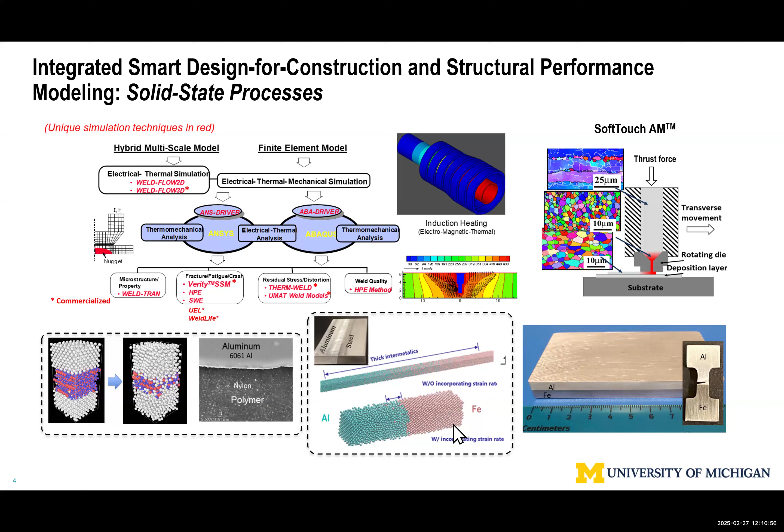So this is what this chart tries to show. Actually, we can replicate that in our experimental setting and demonstrate that the sample is very strong, also corrosion resistant. Later I'll get into that a little bit. So those are the nitty-gritty details. We do a lot of things.

Actually, I try to motivate students who interact with me, saying we don't want to forget the bigger picture. So the bigger picture from those nitty-gritty details leads to say we want quality of life, which is important for naval architecture and marine engineering. Obviously, spring break is coming up, so that's something you might want to consider.

National security is a major topic discussed by this department. We talk about Virginia class and Columbia class submarines, and the difficulty in meeting national security demands.

Energy security continues to be important, obviously with LNG. I'm showing the same picture I use in my 461 class - the Prelude, which is still, I think, the largest floating structure built on the commercial side.

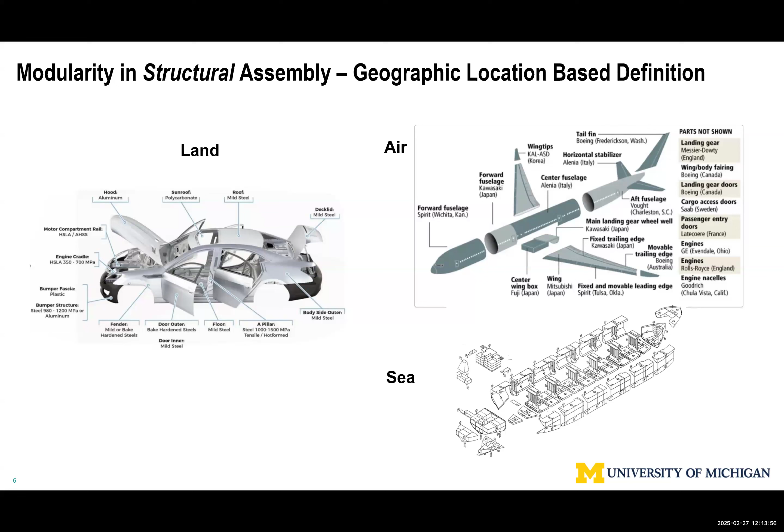With ship structures, from the US shipbuilding point of view, we're still in the early 1990s, late 1980s. This chart was presented to Avondale around the beginning of the 1990s, showing how to achieve modular construction for ship structure, since we're dealing with a very unique product. This is essentially the bible every shipyard tries to introduce into their production process.

What's missing is that all this looks good and makes sense, but it doesn't have the mechanics or physics underpinning how to go about things - what to do before each unit. At the unit level, we can follow IHI, Ishikawajima, which transferred technology to the US back in the 90s. I call that group technology, and while you can read the entire book, I simply summarize it as essentially two items: similarity in interim product forms. Interim product here means everything in between that leads to a given identifiable module - every step of the way has to have a certain principle imposed.

The Japanese had tremendous success with this in the 1980s, but we haven't been able to introduce much change, particularly in the shipbuilding industry. Those group technology concepts - grouping interim products based on similarity in product form and similarity in processes - are conceptual, and cannot be acted upon by physical principles.

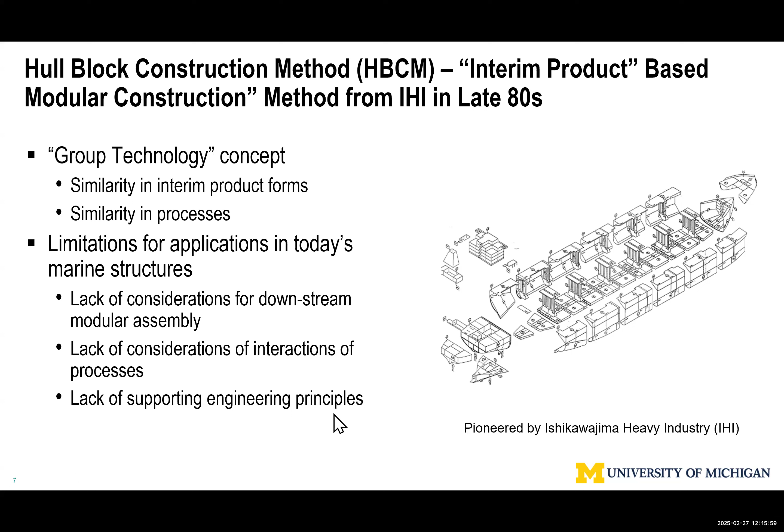You can translate that, and we come to a similar conclusion - they also relate to a shipyard's manufacturing capability. What's missing is three things: similarity works well at one particular stage, the manufacturing cell or family manufacturing process, but how does that interact with the downstream and upstream process, what considerations should apply? And how do downstream and upstream interactions contribute to final quality and performance, satisfying all the criteria? Most importantly, there's a lack of physics or engineering principle that people can articulate or implement across different variations of the interim product. That's what's missing.

Here's how I frame Industry 4.0, particularly in terms of Construction 4.0. The word 'construction' here emphasizes small volume batch production - we are in this regime, either project-based or batch-production-based. When we talk about the Virginia class or Columbia class, we're somewhere in the lower left corner. Regardless of the product, the entire manufacturing industry wants to move to the right-hand side on the horizontal axis, meaning we want part commonality so we can automate.

Digitalization today in Industry 4.0 isn't just about robotics and computers - you have to define a pattern so you can group things effectively together, and then automate based on certain criteria. So digitalization is important. To achieve that, when we deal with one or two aircraft carriers or a couple of submarines, we don't have the volume. So what do we do?

Here's the key point: you have to divide, combine, and finally conquer through a smart modular design construction concept, which I'm going to elaborate on. Only then can you come down to the piece-part level, all the way to the final unit or final block. Once we figure out the product family definition, we can automate. So digitalization covers everything - how to achieve that volume, that repetitiveness, that commonality when we don't have unique identical parts, based on similarity and additional principles.

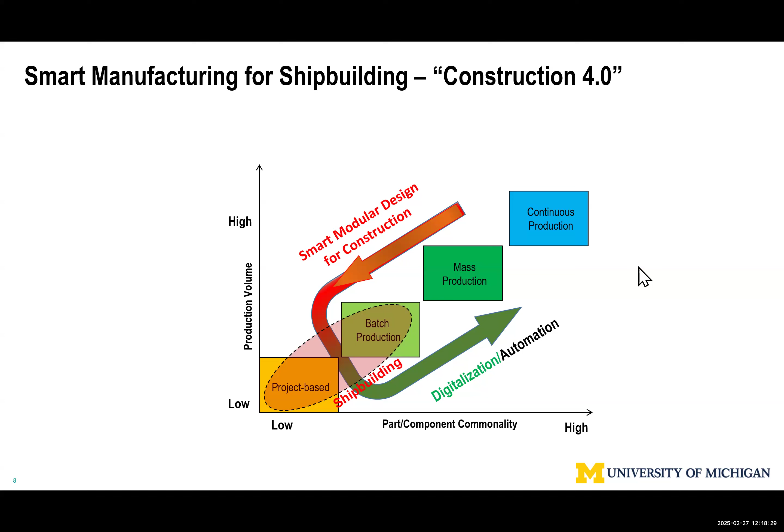So that means there's quite a bit of work needed to be done. You go this U shape, and then we can automate. The commercial side, particularly overseas shipbuilding industry, is doing very well. They are facing similar issues, but they're willing to devote resources and take advantage of new technology, working on this part, diagonally going up or right. Whoever can do it better will be competitive, will be the winner, particularly in today's competitive marketplace, even on the commercial side.

To do that, without getting into detail, the two flow charts I showed earlier, based on the physics, mechanics, understanding the entire process of manufacturing construction flow, we come out with the 5S principle. Some of you are already familiar with that from my courses. We borrow what group technology offers: similarity in product form, similarity in processes. The mechanics underpinning this, for lack of a better description, we have symmetry in geometry, symmetry in processes, stability in shape, and supportability.

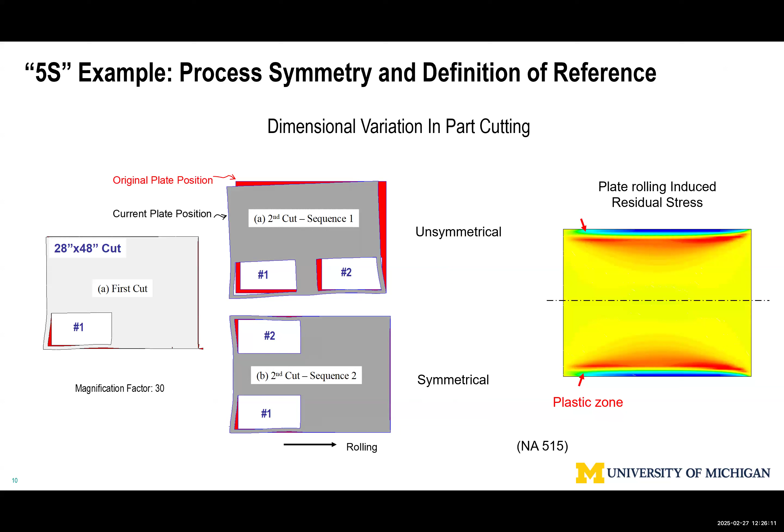I asked one of the major shipyards, why do you want to do that? They said they need $2 million to do reprogramming of the CNC tape. That's not just a technological issue, that's how business practice over the years becomes a culture issue, right? They cannot do reprogramming - another plate, cut plate 1, plate 2, plate 3.

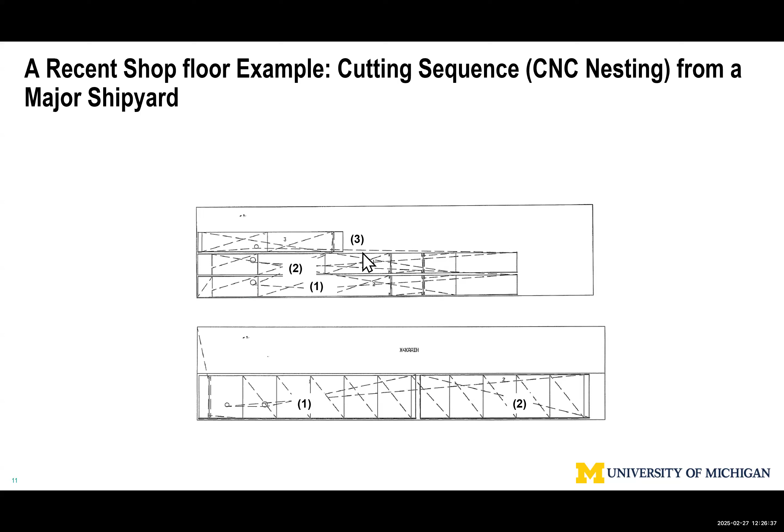So the argument is I want to make the best use of material. Actually, you can cut plate 1, cut plate 2 on top, cut plate 3 in the same location without introducing any additional material waste, right? But that will give a better result. So anyway, that's just an example.

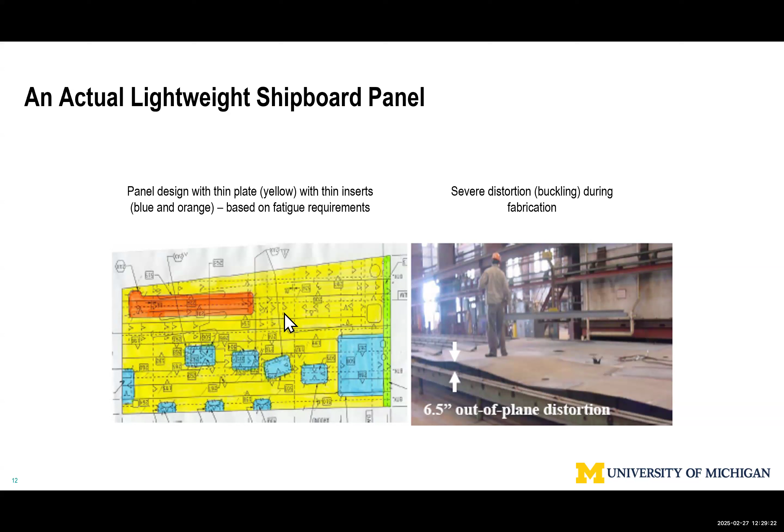This is still happening. The Navy's rules require you to reduce stress locally when you have equipment or weapon systems, and they don't want you to use any other design scenario. So that's one situation we have to mitigate. The criteria is based on 1950s technology or understanding.

Sometimes we don't have symmetry, because by definition ship structure is very complex. Here I'm using an example to illustrate when you weld a T-stiffener — look at the titanium. Because titanium extrusion is very expensive, we had to use what's called a fabricated stiffener, a T-stiffener. So anyway, you tie them together, you put this weld together, you develop measurements from the flat surface.

5.8 millimeter, 7.5, 8.3 — that's already out of whack. Imagine you're going to do 20 feet. That means if you don't have symmetry, you have a problem. That problem has to be mitigated by smart fixturing.

That needs supportability, and then you have to accomplish stability by using additional means. In that case, we can use proper fixturing, which means providing clamping. Clamping has to be positioned in such a way to produce uniform load distribution as close as possible to the action zone — the action zone is the plastic zone.

The plastic zone is located at the intersection. That means you want to be as close as possible, but too close interferes with the assembly process, so you have to compromise.

For illustration purposes, using a computer model, we can demonstrate that just by doing this you get a very significant reduction — 0.7, 0.9, 2.2. This gets validated by measurements.

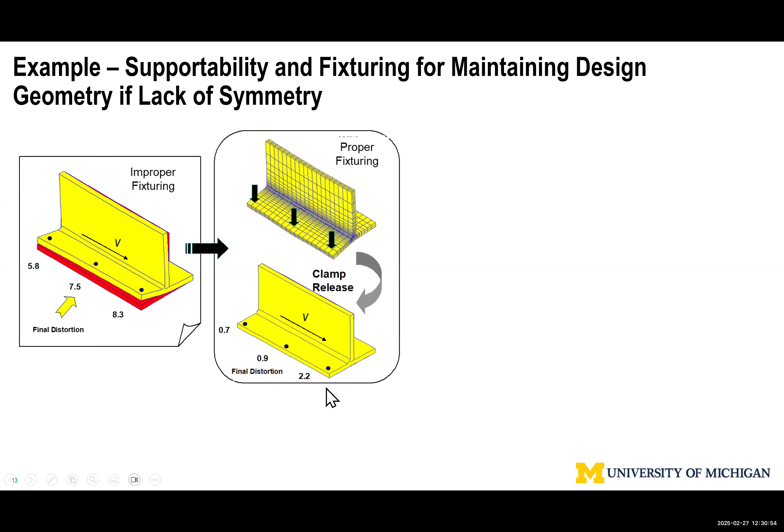During this process, we asked, for this particular case, that you had to use clamping. Back then we didn't do Zoom often — there was no Zoom — so on the phone they said, yes, Dr. Dong, we clamp, we tie down. And now we see what happened.

Remember we talked about supportability. This bottom doesn't have enough support to give you a reference surface. The base plate, before you put a stiffener on, reacts to that local big rock loading. This curvature is solely due to the position of this block, producing local elastic deformation.

That gets welded into the stiffener, and then we blame the welding process for too much heat input. Right? So actually, today the inaccuracy problem is not just one particular process — it's the entire system lacking process definition.

So this doesn't have supportability, doesn't have symmetry, and then you need proper fixturing. You can still use this, but you can manage to distribute the load with a heavy beam and bottom shoe support — which, in my 461 class, I have a number of examples demonstrated by shipyards.

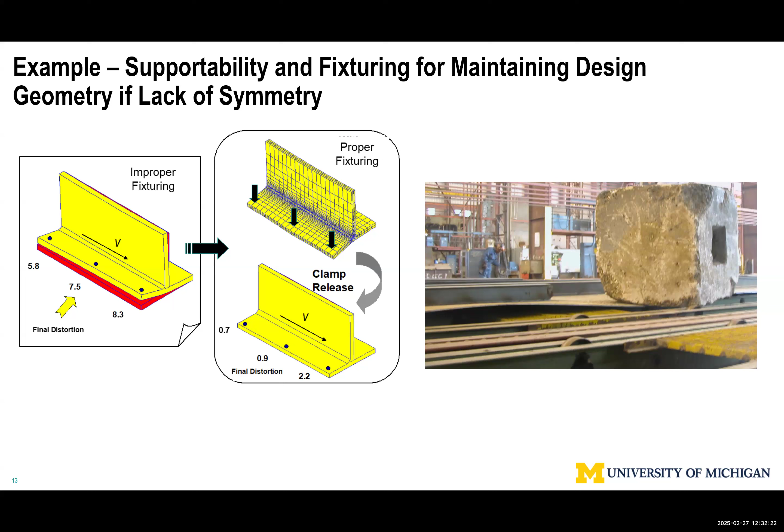So when we say clamping, fixturing, it's not just putting heavy weight on it — it's where you position them. Where you position them, the physics comes in. The reason you produce that asymmetric deformation due to geometric asymmetry is the plastic zone, called the shrinkage zone.

If we look at the T-stiffener and L-stiffener, cooling produces a natural shrinkage reaction. That shrinkage reaction only occurs within this plastic zone neighborhood. For the rest, if you plot this deformation from the bottom surface, what you see immediately is just like when you open a door — the hinge is the plastic zone, shown in gray.

The rest of the door is a rigid body rotating. That means if I do any clamping here, that doesn't do any good — it's elastic deformation, fully recoverable. During welding everything looks reasonable, but as soon as you release it, it pops back.

The only way for that to work is to put a clamp down only vertically, as close as possible in this neighborhood. It doesn't matter what steel, aluminum alloy, or titanium you're dealing with — the magnitude varies depending on material property, but the trend is identical. That means the same methodology can be used for different materials and different structural elements.

To demonstrate that, here's an example — a shop floor example. This particular supplier is a manufacturing shop willing to invest. Any time you talk about clamps, they'll clamp things down nicely. They have a heavy floor, and they can put a bolt in as a connection device.

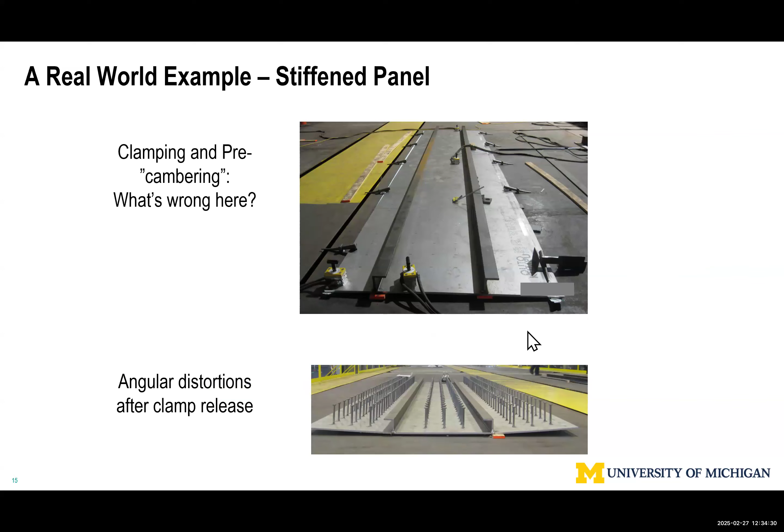So that's violating the existing criteria and doesn't work, even though you're willing to use a point clamp rather than this big giant rock, right? Actually, how to do that?

One particular company is very interested. They look at it and say, when we explain, you had to move things closer, and they tried. This is the clamp coming down when they weld this particular weld. Now everything released. This still indicating virtually flat versus this particular case.

That means not just simply tie things down. You have to know where to work with, right? What position, what manner you're going to apply to achieve that supportability and the shape stability.

So again, when we deal with realistic marine structures, sometimes you have to deal with funny design features. A lot of the time we don't have much control. This one we call complex panel. We tested in one major shipyard. This part has a 10 mm insert, rest of them is 5 mm with T stiffener. Obviously, by definition, no symmetry. They put the butt weld together, put two plates, and then assemble stiffener.

Actually, when we run into this situation, we talk about divide, combine, and conquer. That means if you don't have an opportunity to change the design, when somebody gave you this design, what we can do is let's isolate the part that doesn't offer symmetry, add a lot of complication. That means don't weld this weld first. First deal with the two halves. Bottom half symmetry, top half you require special tooling.

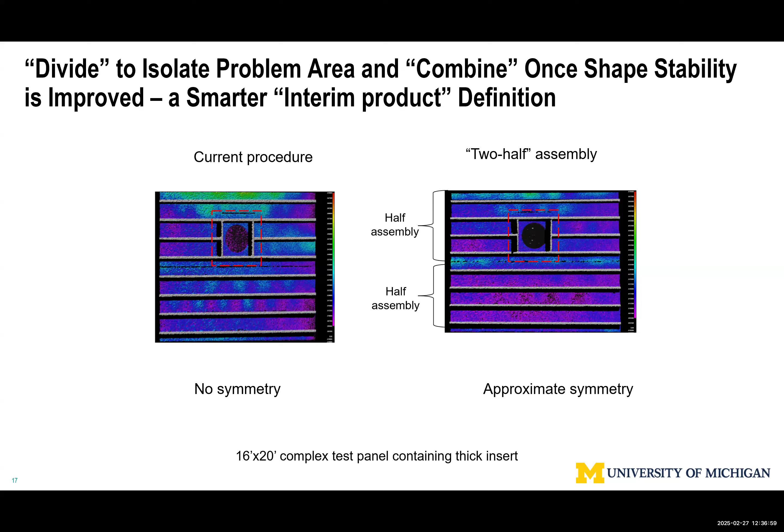So that's the improvement. Again, we are not introducing any new equipment except changing the flow, the workflow, by defining the interim product differently based on those physical attributes. I call it a 3S principle. Right? So that means we don't always need everything ideal. As long as you know the principle, you can apply them properly.

Again, talk to most of the US shipyards today, except one, and nothing's changed. And if you ask them to put the 8 stiffener together, they always start from one side. Actually, one particular shipyard follows a river flow direction. Historically, they follow the river, upstream, downstream. So you assume this upstream, go downstream, assemble all 8 stiffener.

We demonstrate with the computer model every now and then. Say, let's demonstrate. The residual stress becomes very unequal, unsymmetrically distributed, which is very bad for buckling. Stiffener 1, stiffener 2, you can see the blue color is compressive residual stress get built up and unsymmetrically with respect to the neutral axis of the panel.

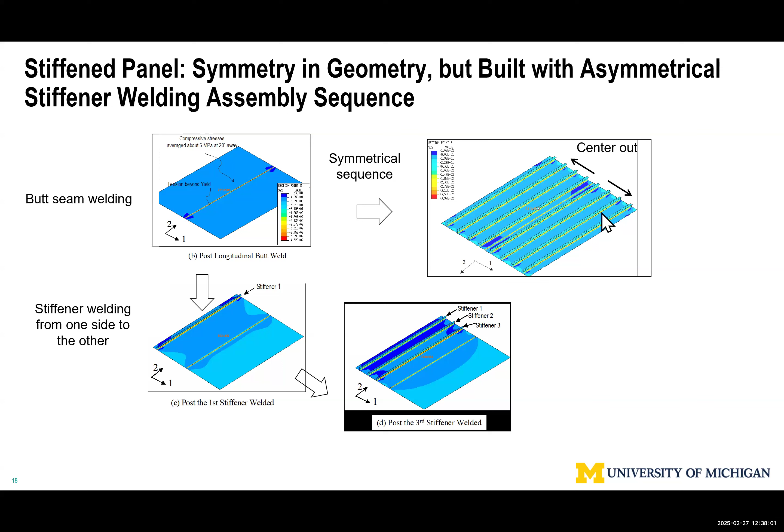If you do center out, 1, 2, 3, 4, 5, 6, 7, 8, you get about 3 times the buckling resistance versus the conventional procedure. Again, we demonstrate that with the actual production line by designing what we call a test panel that's 16 by 20 feet size, using conventional method, inside out, almost virtually nothing, right?

And then we can also use the reverse arching, stretching the plastic zone, the shrinkage zone, without getting into detail, almost all gone, satisfy all requirements, except by that time, because when we do reverse arching, we bought this 2x4 wood block from a Home Depot near the shipyard. By that time, the 2x4 wood cannot support it anymore, collapsed. Okay, this part caused some damage. Otherwise, this panel is perfect from their dimensional accuracy acceptance criteria point of view.

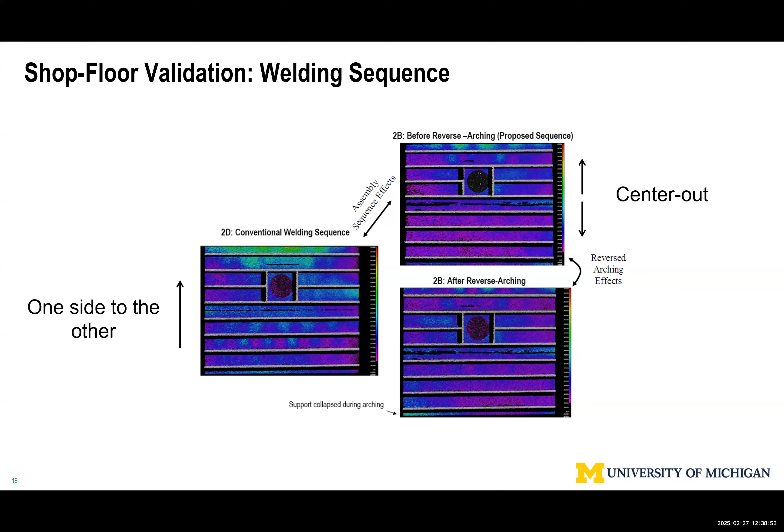So now, when we talk about symmetry, this is a chart I used in Virginia Beach. And one time I got invited to give a keynote lecture on automation. And they wanted me to talk about automation. So actually, I showed them the 5S principle. In the end, I concluded that the best symmetry is simultaneous.

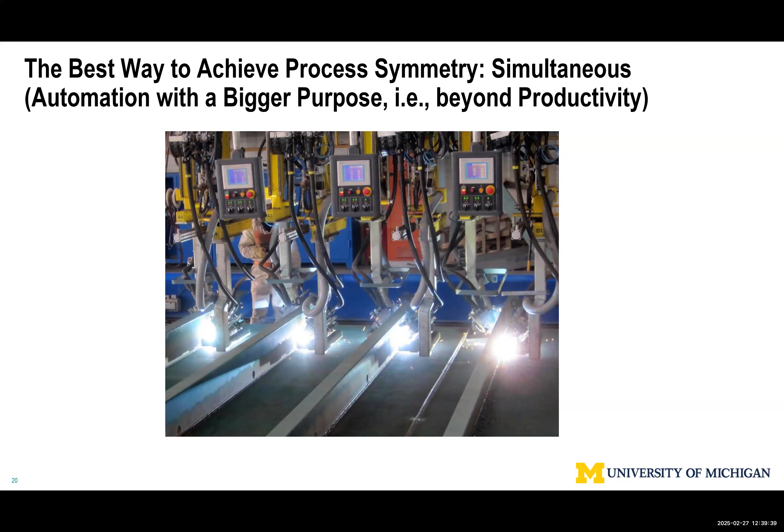Actually, back then, Japanese—this is where the picture is coming from. They can weld 8 stiffener, 16 torches. That means each stiffener has a two-sided weld simultaneously, tacking, finish welding. So that's the best mathematical symmetry. No US shipyard I know of welds more than 2 stiffeners simultaneously, based on pre-COVID knowledge, unless things change. The Japanese, 15 years ago.

So now another industry related to Generation 3 nuclear reactor protection shield. The story is that we want to do modular construction, modular assembly, go to power plant, assemble this together. They're gonna build thousands of those units. This cross section is about 16 feet or 14 feet, gonna be 70 feet long into the paper. They're gonna build thousands of this, ship to Florida and South Carolina. Everything's good on paper, okay.

They say, doctor, can you help us develop an optimum welding sequence? I said, I want to be honest with you, nobody can fix this problem. That's because the design is bad. Again, for those of you who took my course, keep quiet. I asked her, were you not taking my class yet? I'm not taking it. What's wrong with this design?

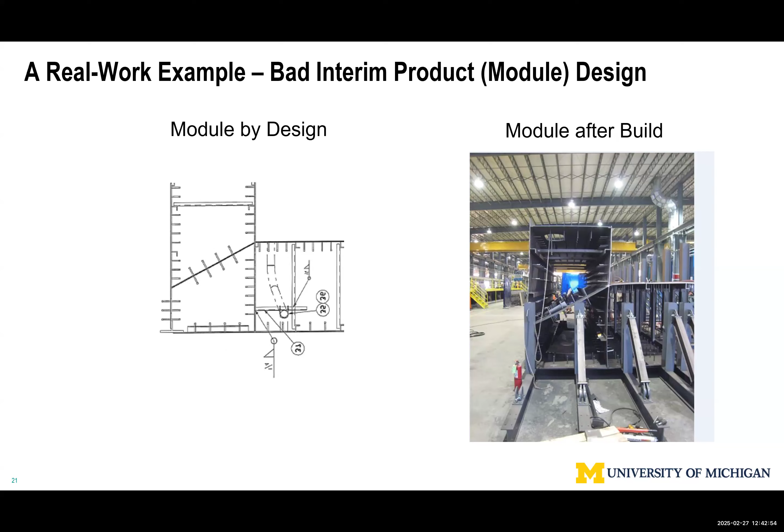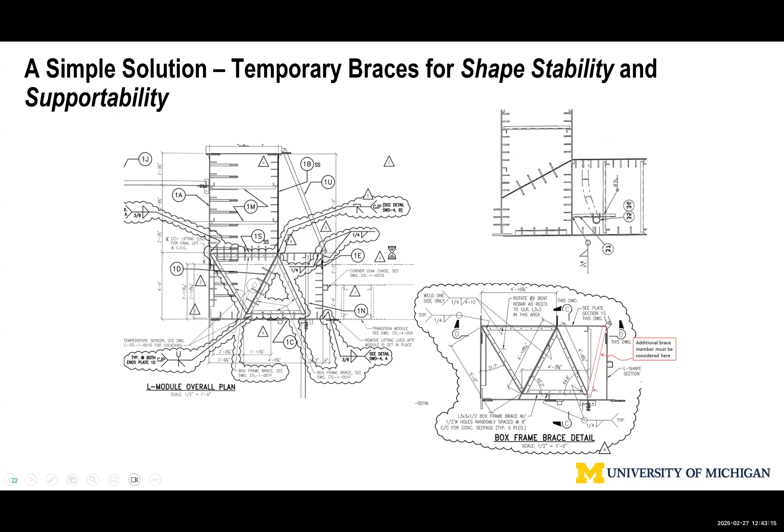If you have such a bad design, how do we mitigate based on the 5S principle? That means we don't have stability, we don't have supportability, we don't have symmetry, then we need to provide the support. So this one, after the first iteration, we put an angle, stainless steel, attached locally every 2 feet into the screen. Here you can see how the sausage gets made. This is my note - when they send this to me, they say we need another support. We put everything together. This is what I shared with you, and this is after.

Actually, you don't need to do measurement between the two after this. Back then we had national labs coming in, saying we're going to do massive supercomputing. Doesn't matter what computing - if the design is bad, you will not be able to find a solution.

In the end, I was talking with some people on the shop floor. What is that? That's middle school triangle stability, right? So we don't need this fancy solution. So what you do is this angle iron gets welded. We develop qualification for tack weld, later on they can be knocked out.

For this particular case, because it's going to be 70 feet in this direction, there's a lack of stability. So in the end, we agreed that this brace has to stay on until after site assembly. Then you knock it off and reuse it. So when you look at the production flow or construction flow, only remove those tooling when stability is established. That means you have to have those things go with the component all the way, right? So again, with that, I'm not sure.

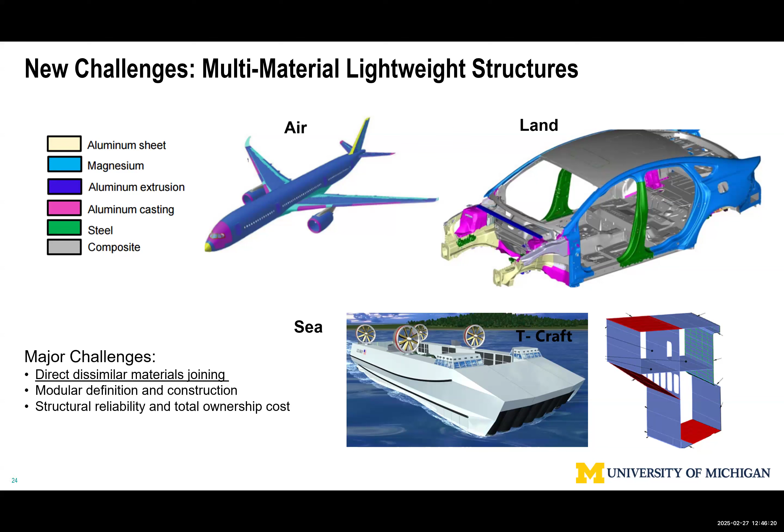So again, quickly, some of the technology relevant to that. This was really prepared to take on those multi-material structures. We can look at the joint without intermetallic formation, proven by our MC squared, very high definition TEM.

Another one deals with plastic to metal direct joining. We can do this by introducing localized pressure and temperature. That's the key. Even this morning I had a meeting with the MSU polymer chemistry professor. They were puzzled how this process would work. They're going to develop an experiment to observe it.

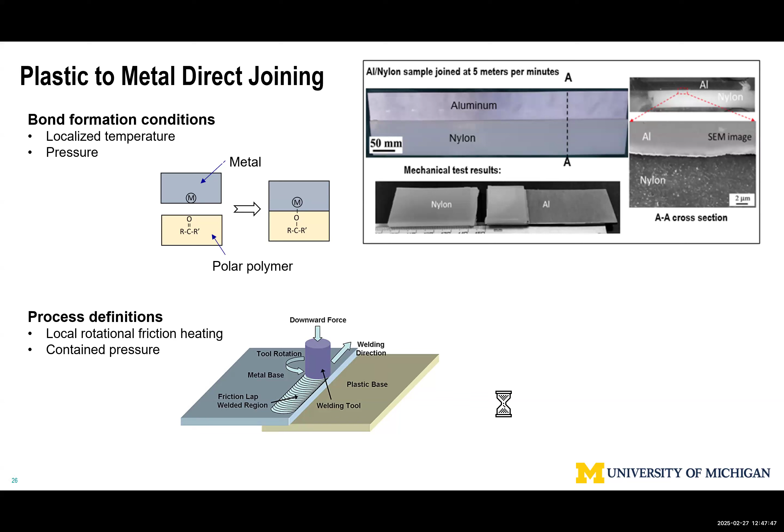Under that pressure and temperature condition, we can produce molecular level bonding, and that bond creates such a strong interface, no micromechanical interlocking involved. That means the superb strength has to be accounted for due to the presence of molecular level bonding. And experimentally, we observed that particular aluminum carbon oxygen bond.

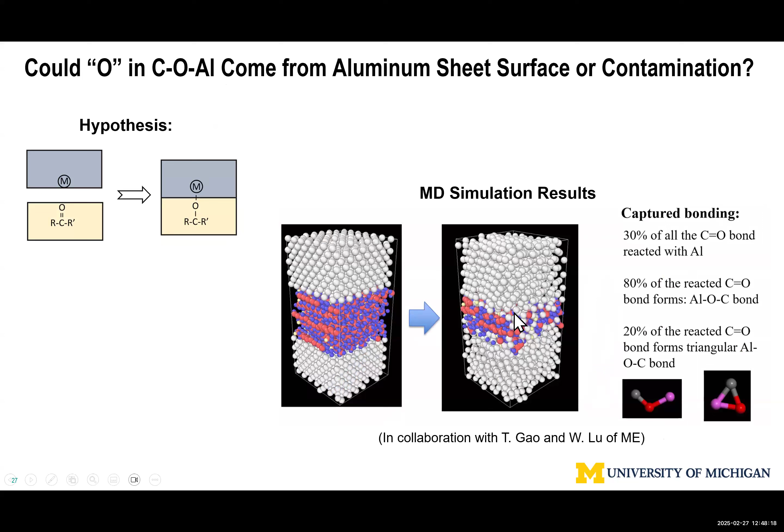And lastly, just one quick example. Multi-material makes manufacturing even more challenging, right? We have a lot of trouble with same-material welding, but it actually offers more new opportunities.

Using fracture mechanics principles, we can demonstrate for a given two material combination, I want to use this condition to create the best strength, this condition to produce the best structural strength under fatigue fracture loading conditions. Use this condition and I can open it. I don't want my enemy to know it, right? So I can open it when needed, either for repair or remanufacturing.

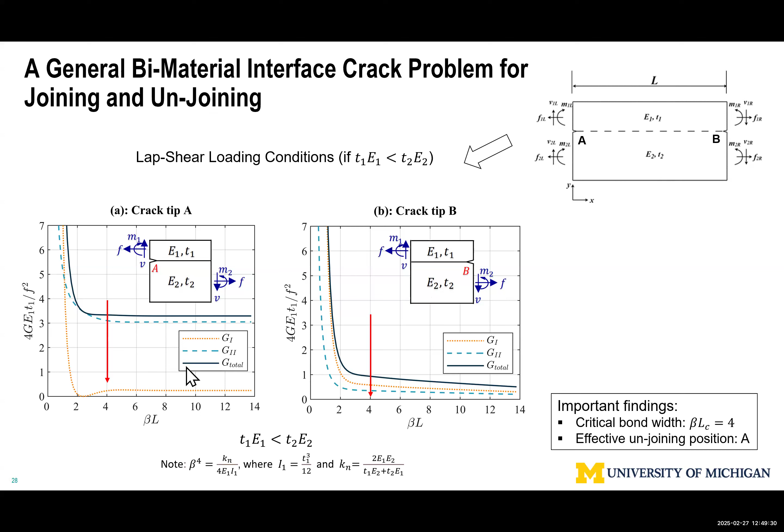So with that in mind, we've got to design the bond to be so effective, so efficient. We don't want to overbond, because later you want to make it easier to debond. So we developed criteria for arbitrary combinations of material.

If it's nylon to aluminum, the bonding width is about 5. If it's aluminum to steel, based on this thickness ratio, it's about 3. We can demonstrate this gives you the maximum strength. You don't want to overdo it, it's costly, adds material, and has environmental impact. You just want to do enough, right?

So with that, the aluminum-steel combination produces an almost pristine bonding surface opening. That means almost immediately you can rebond them, rejoin them, reweld them as needed.

If you use a tensile load, simulating structural loading in a service environment, you develop fracture on the steel side or on the aluminum side, which is desirable, giving you maximum energy absorption, and also the best fatigue fracture resistance. Right?

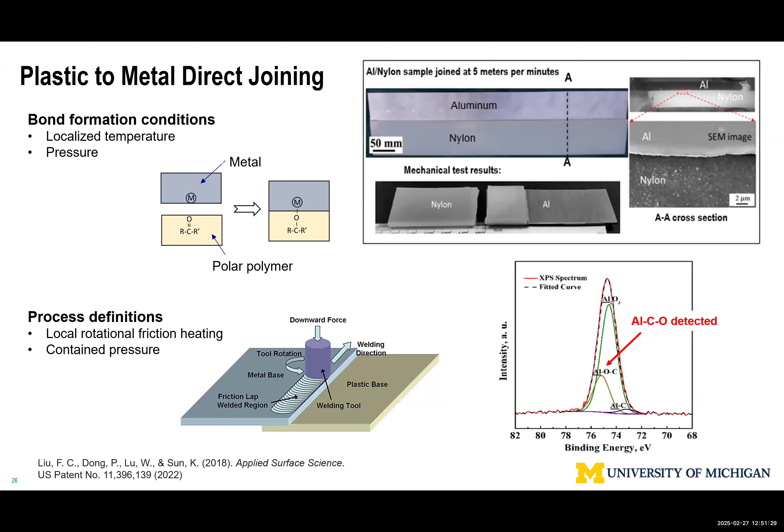You put them together, produce a very good bond. This is exactly the same sample as this one, okay, the same type of sample.

You can pop it open at a particular location based on the relative stiffness and thickness combination, and that opens up. You just brush it a little bit and reload. As long as we deal with thermoplastics, that process can repeat many, many times.

So we try to understand the fundamental mechanism at play with the LSA chemistry professor.

I'm running out of time, so I decided to keep my concluding remarks more generic. My message is about construction 4.0. We'll emphasize computer power too much for the cyber aspects, but nothing can replace the underlying physics and mechanics. Even with the simple examples I showed, the underpinning is understanding that bit of physics. Understanding a little physics doesn't mean making things complicated - if you fully understand things, you can make them much simpler.

With that, I frame everything under smart construction as a key enabler for dealing with unprecedented marine structure related challenges. On the commercial side, my funding mostly comes from industry, which is rapidly adopting this technology. That doesn't mean they know everything, but they're willing to invest and try new things. This part maybe isn't offering much.

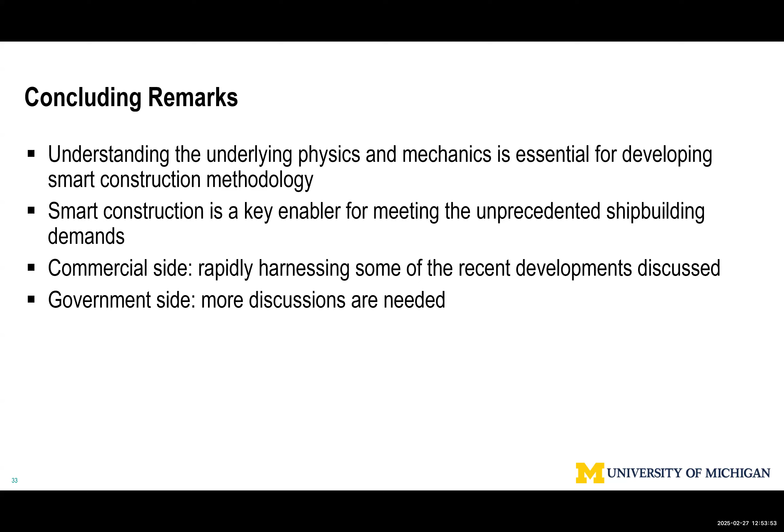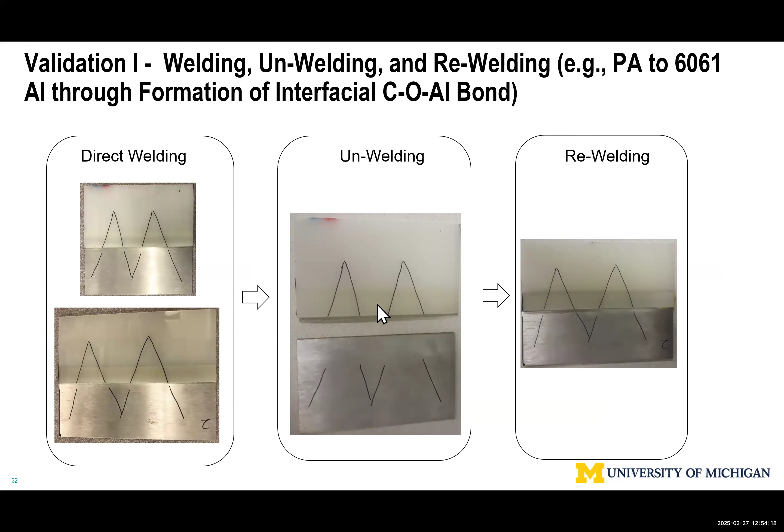Very good question, that's the trick. By definition, if you want to reuse material, reuse a piece part, you want the crack propagation to go along the interface without damaging nearby material. But if you want that joint to perform best under all loading scenarios, you want the crack to go into the material and stay away from the interface. In that case, you want this type of failure mode demonstrated, which only requires that the bonding width be properly sized. Today everything's empirical, just because the stress state is so complex.

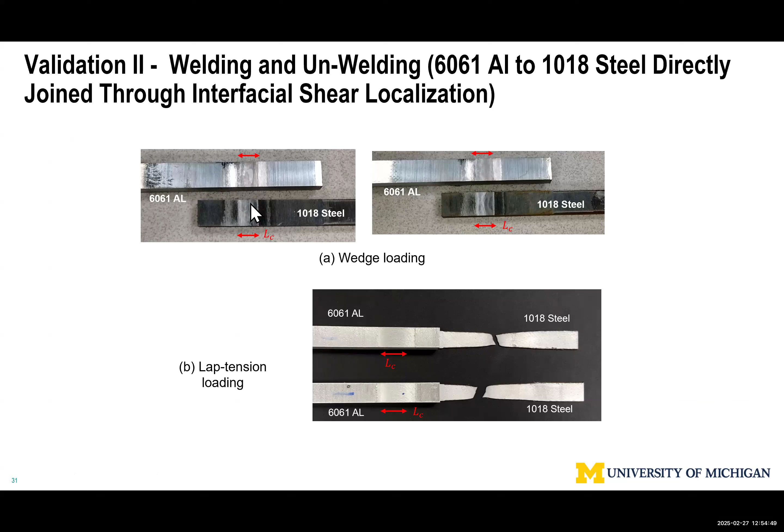And also how to deal with defects - I'm not claiming we know everything, but this is a new concept we developed over the last couple of years. That means if you want a clean open-up, you have to have a trigger in the design. That gives you a clean interface. So coming back here, when you're the OEM or the regulator, you want to see this type of fracture under test, because that gives you the best load capacity. And if you want to make sure this always happens...

If you look at battery packs - recently I looked at battery packs in electric vehicles - they put a massive amount of adhesive everywhere, because they're not sure how much is needed. So what we're saying is you have a minimum bonding length, taking into account some defects and quality issues, adding say 10%. That's all you need to take on the worst case scenario load. Anything more than that adds cost and inconvenience.

And then we can design a process - for example, this length is important. If it's too long, you're not going to open up effectively; it has to be sufficiently short. This is based on fracture mechanics principles, so we can pop it open. I'm not sure if I answered your question.

That was, I think, more what I was asking - but that was really interesting. Let's say there's a hole in material two that a crack is originating from, and it's propagating from material two into material one. What happens at that interface?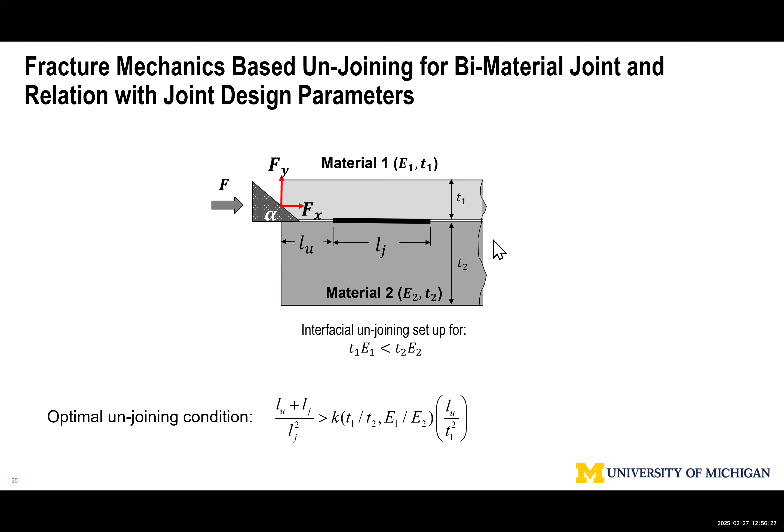That interface will be intact - by design, you want to have that. If there's a failure, you want to have that failure, because that gives you the best load capacity. I think that corresponds to this case, because you may have a bubble or some defects, and you want to make sure the minimum bonding length already accommodates those defects based on statistical analysis of the quality.

Yeah, makes sense, like that.

Questions? So how is 3D printing and those kind of processing methods used in your methodology?

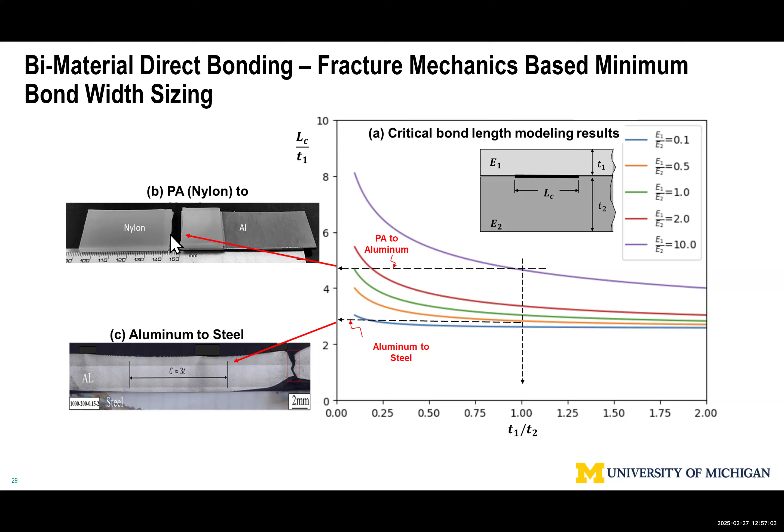I think just in the beginning chart, we look at this, that's how. Let me just quickly come back to that front chart. Well, I decided not to get into it because that requires some pretty detailed discussions.

3D printing, if you deal with metal, steel, plastics, I don't have much knowledge because mostly my professional life deals with metals. 3D printing is nothing more than what we call all weld metal construction. It is welding, doesn't matter if it's powder bed process or wire feed. It is welding. So this demonstrates that.

So actually, welding has defects. 3D printing, this is a CT scan. Those colorful indications are cracks, porosity, shrinkage, or inclusions. In welding, we have a similar situation. That means a lot of the things I talked about can be directly applicable.

And actually, I do have a DOE project supporting nuclear application, how to certify this type of component, right? And then the other part, in terms of residual stress distortion, they already have the arrow indicated.

Actually, recently we looked at multiple samples, that's discussed in my 515 class. Inside-out deposition or scanning, doesn't matter what's going on in between, gave the best results in terms of dimension accuracy control, and we already heard about that word, inside-out. So it's directly applicable, but there are some other issues when we deal with interpass interaction, but they're still very similar to welding. Thank you.

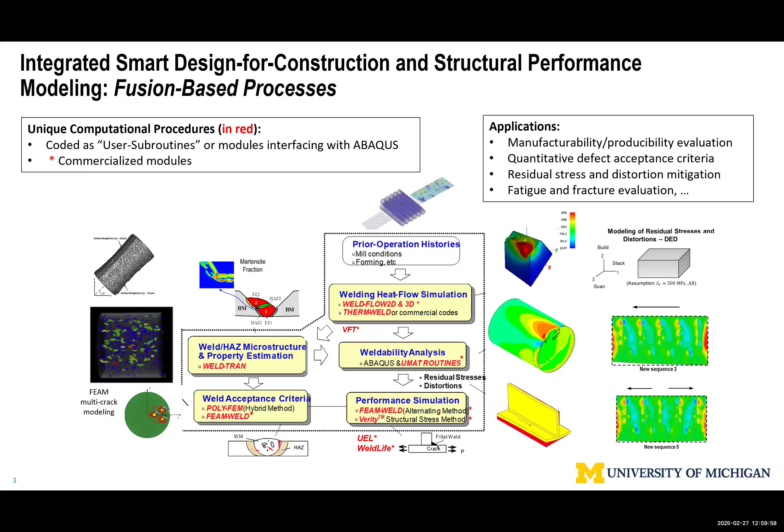Very simple, I think that's in the one chart I just went by pretty quickly. It is in our lab, we could show the machine disassembly. We just use a CNC machine essentially.

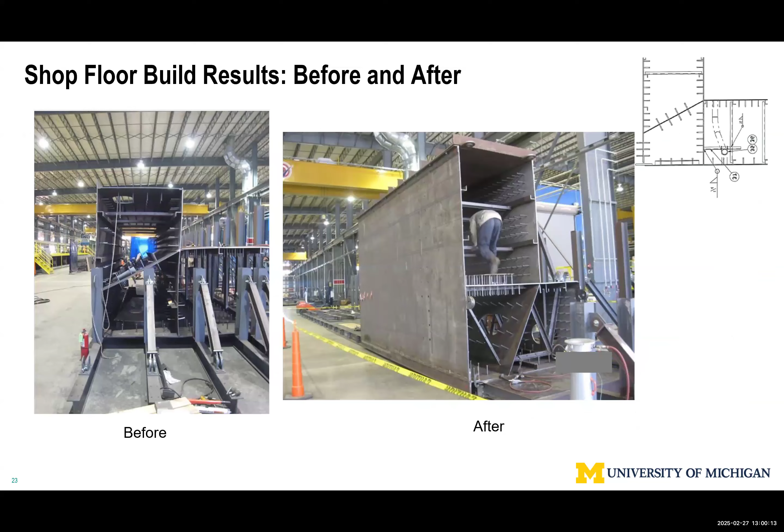This is just cylindrical tooling, H15, H13. I think one of the, still not here. It's very cheap, you just get this because if you deal with aluminum, you don't need a special alloy. You put this in a tool holder, rotating and sliding. It can go to 5 meters per minute, pretty fast, but that already satisfies our automotive requirement.

So what it's doing is producing friction heat that propagates to the interface, right? You can do laser if it's transparent, that would be laser coming from the transparent side. You can do induction, and you can tune the frequency so the heated region is at the interface. This one produces a pattern sort of like a friction stir, but in reality it's not friction stir welding because you don't do anything to the interface, but the heat gets there.

By definition, this little cylinder also serves as a pressure containment, producing a local pressure vessel effect. During that process: heating, pressurization, and then you finish welding. Very simple. You can use induction or other means, but you cannot put this into a furnace and pressurize it because you'd violate the localization.

Because you need the support. What happens if you heat it up? This plastic becomes so soft, it just comes up. You need a surrounding support. This little flat surface tooling worked very well. We are in the process of understanding the chemistry involved.

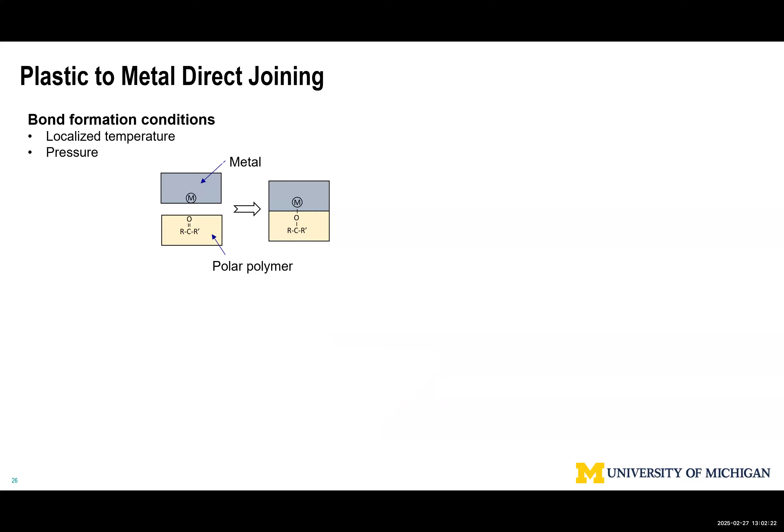Yeah, so I think the essential issue is this chart. That means when we say design for production today, it's by experience, all people sitting together. Yeah, it doesn't have a quantity tool.

So the reason I'm bringing this up is the Koreans, Northern European shipyards, when you give them a vessel design, what they do is spend a lot of money and manpower figuring out how to build it. And that's the time to introduce this. We are not changing the overall architecture, so you need a box beam, but how to make up that box beam, right? We talk about it, but we don't do it quantitatively. This requires quantitative measurement each step of the way.

Because I think the government contractor believes this part, they cannot charge for it, it's not value added from that point of view. So we do, if anything, minimum. Managers, design engineers, everyone sitting just like this room, comment on it, rather than rigorously establish how to satisfy those criteria.

And I think I mentioned to you one discussion: once we have this, we can implement it using AI. AI to detect patterns means you have to have recognized attributes, you have to detect the patterns. We had reasonable success, so that could be a separate topic in the future.